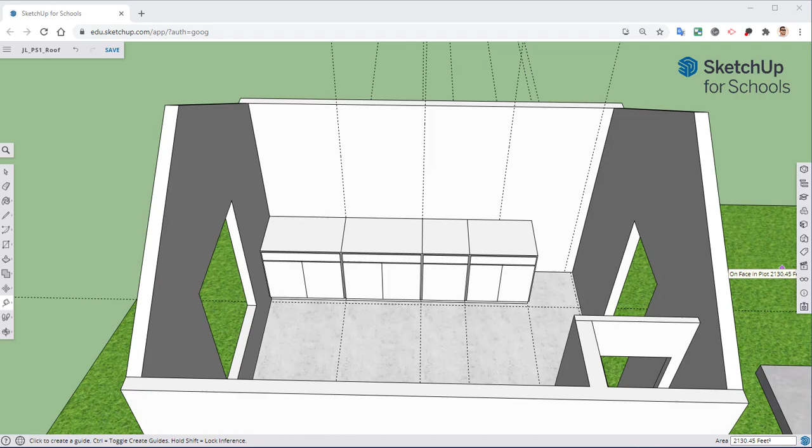In this episode, we're going to finish up the right side of our cabinets and then start working on the left side. For the base cabinets, we have this one spot left, and we already have it spaced out. This is going to be a 24-inch 3-drawer cabinet.

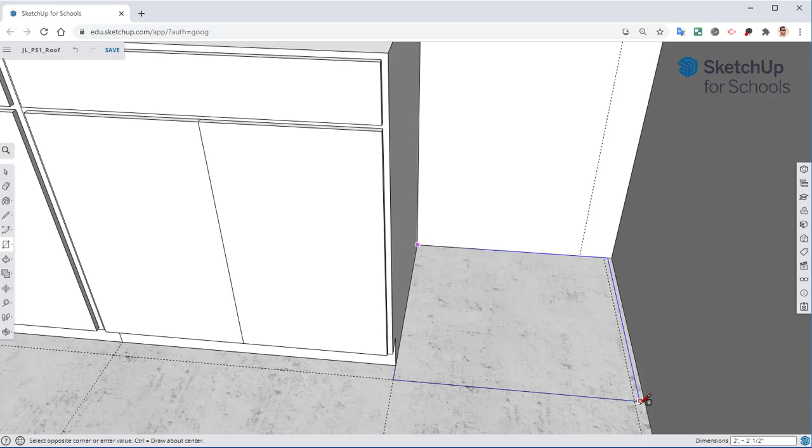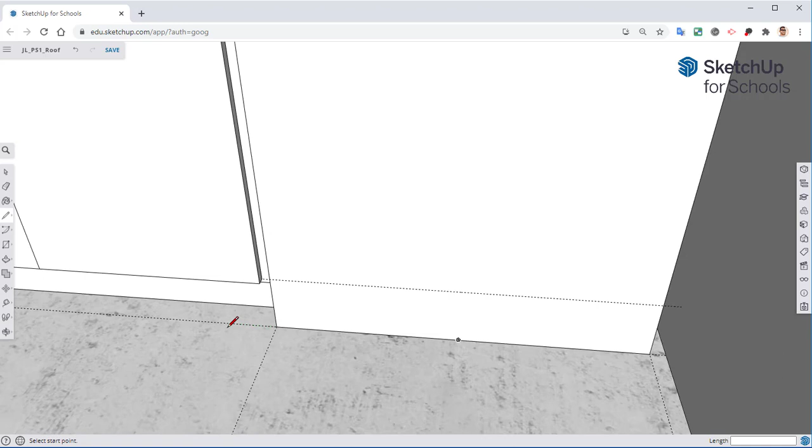Take our rectangle tool, draw in our rectangle, use a push-pull tool, and pull this up to 34.5 inches. At the very bottom, take our tape measure, click the T key, type in 4 inches, hit the L key for the line tool, and draw a line across. Use the push-pull tool and pull this back 2 inches.

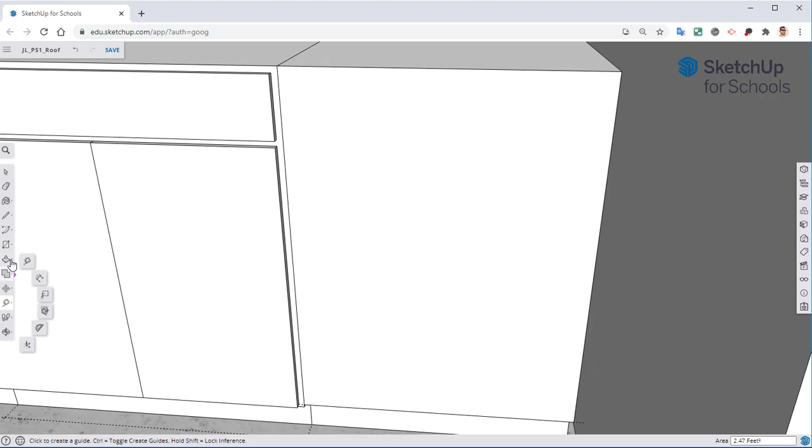Click on the offset tool, do an offset of 1/2 inch. For this one, we need to, like we have previously, draw in these 2 lines and erase this bottom line.

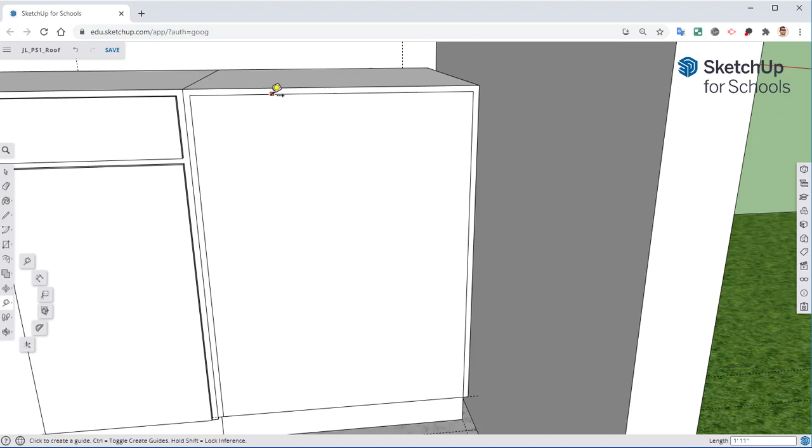For this one, it's going to be a 3-drawer cabinet. So from the top, we're going to go down 5 inches, then .5, the next one is going to be 9.5, then 0.5 again, and then we have the rest of the cabinet.

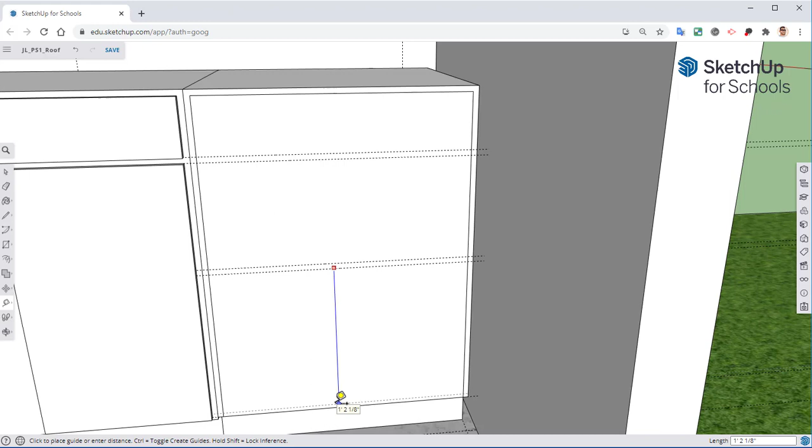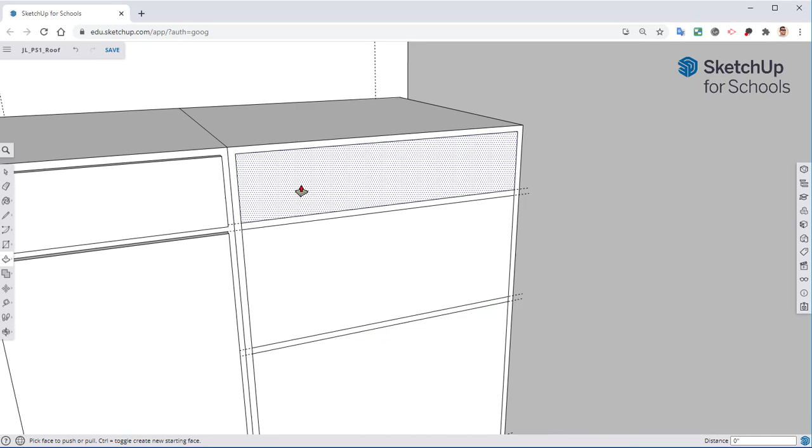From here, we're going to draw in our rectangles, use the push-pull tool, pull these out 1/2 inch. Take your eraser tool, and we're going to clean up our guides and extra lines.

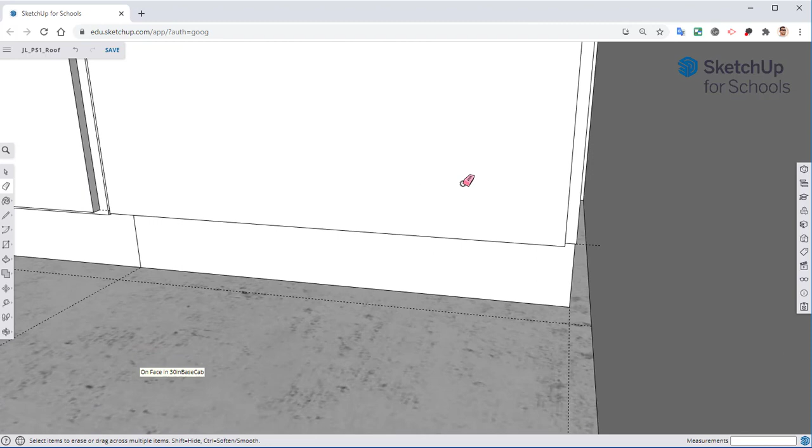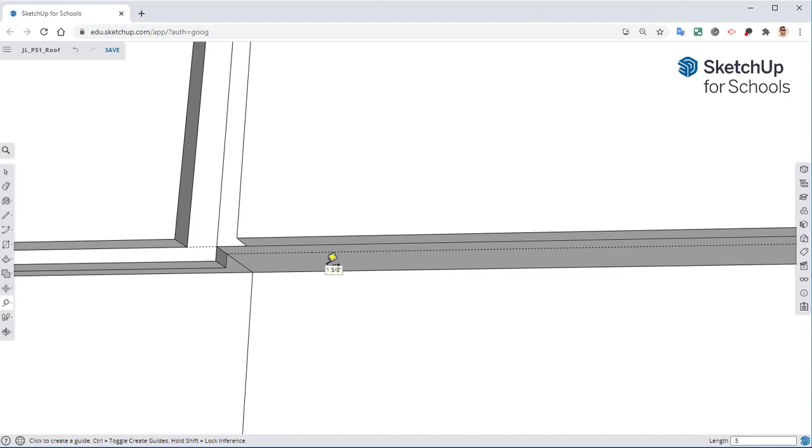Underneath, we're going to again draw our line like we did previously, going across. Use your tape measure, go backwards 0.75, or actually go back 1/2 inch. Take our line tool and draw in our line going across.

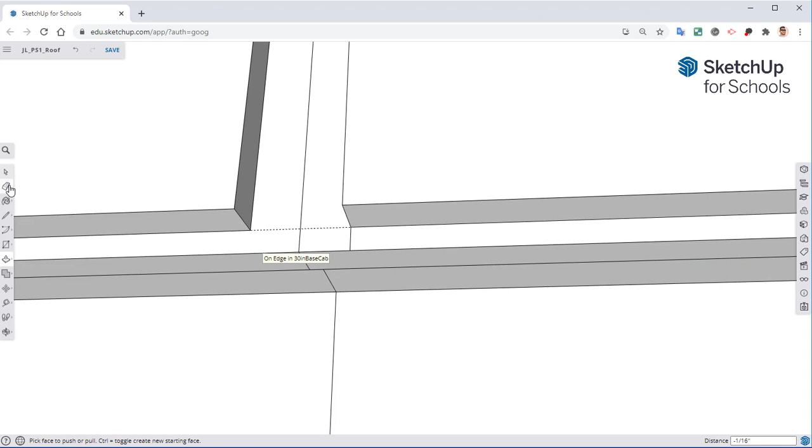Push-pull tool, and we're going to come over here and pull this down to line up with our others. Go ahead and erase our lines that we don't need. Okay, there we go.

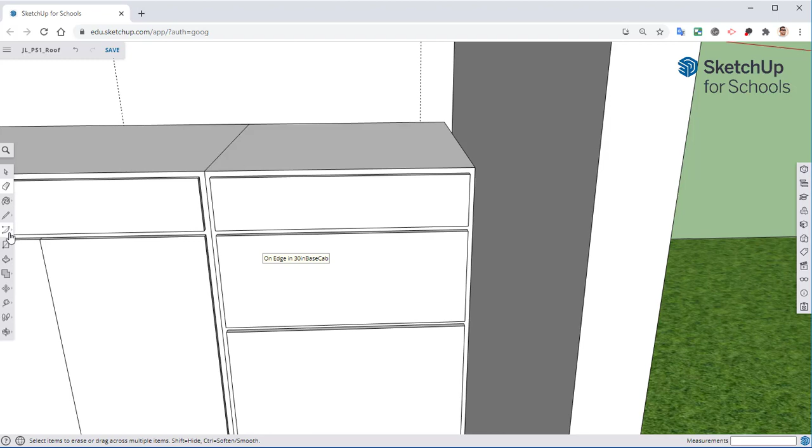On this other side, I want to take my rectangle tool. Actually, we'll just take our line tool, draw in a line from the very bottom going across. You can use your arrow keys to make sure you align them to the red, blue, and green axis. This one is going to go straight up.

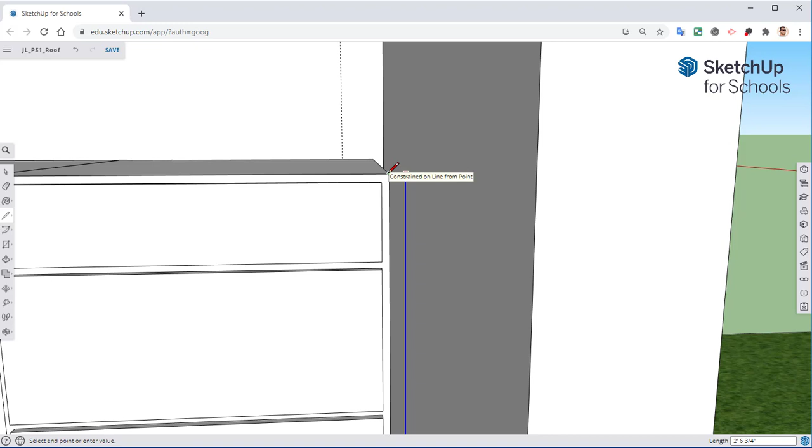Hit the up arrow key, move over to the top of the cabinet in order to constrain it to that point. Go ahead and click there, and then draw in our line to close in our rectangle. Take your push-pull tool, and we're simply just going to pull this back 0.75.

Triple click on that cabinet, right click, and we're going to make that a group.

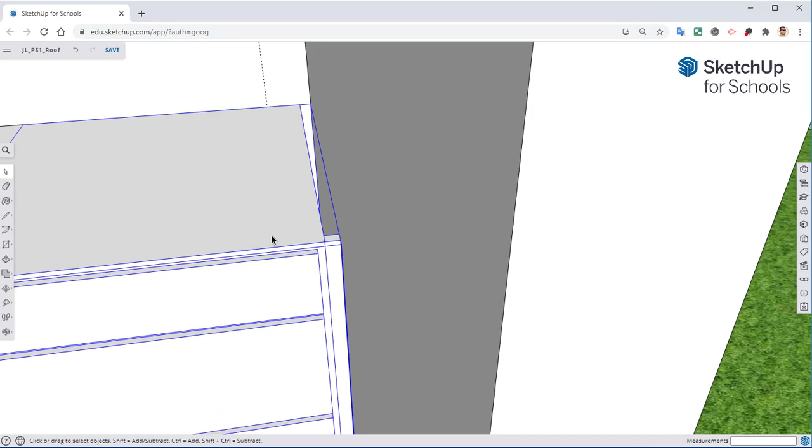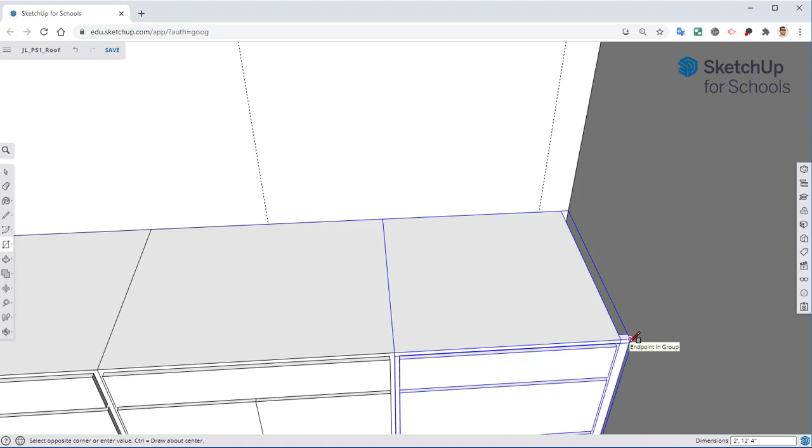Next, we have our upper cabinets. First off, let's go ahead and draw in our countertop. Again, this is going to be one big rectangle. Take your push-pull tool, pull this up 1.5 inches, and then pull it out 1 inch. Take your selection tool, triple click on it, right click, and we'll make that a group.

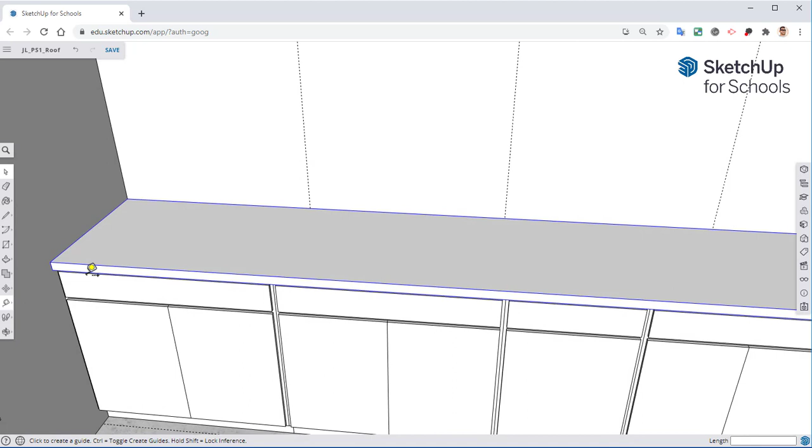The upper cabinets are 18 inches above the countertop, and they are 30 inches. Then we're going to have 4 of them, and we'll have 1 gap over here on the right.

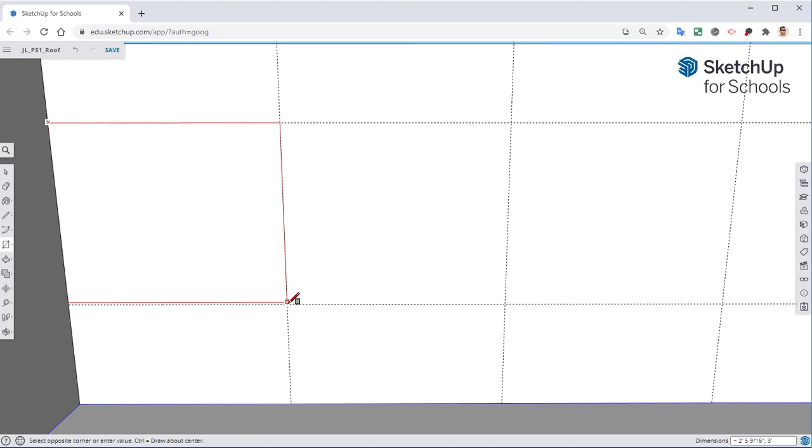So take our rectangle tool, draw in our rectangle. Push-pull tool is going to be 12 inches. Click on your offset tool, offset of 0.5.

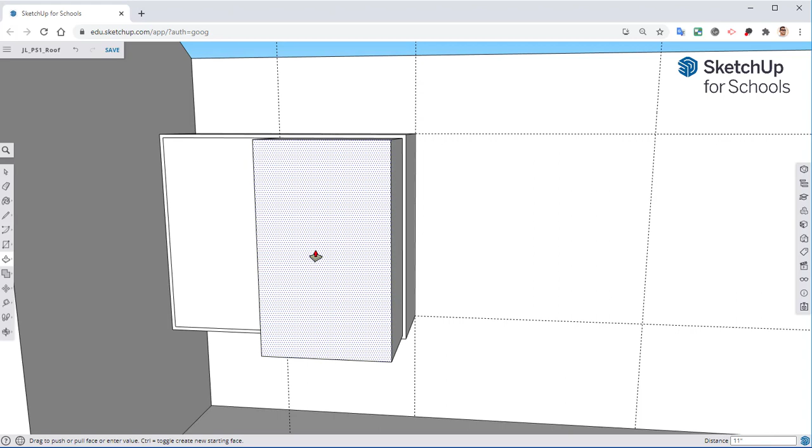Take your tape measure, and we're going to find the midpoint, and we'll draw in our rectangles. Let's pull these doors out 0.5, and we can pull that one out 0.5 as well.

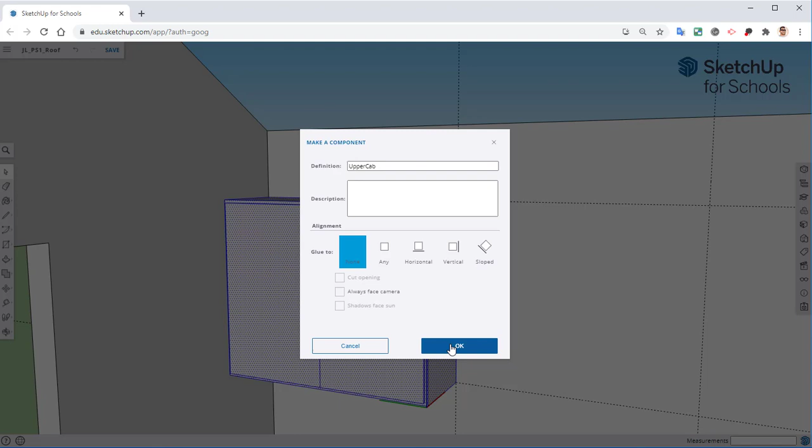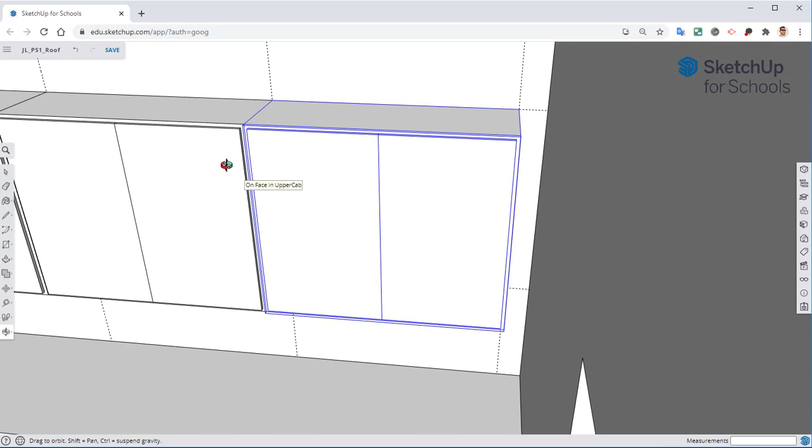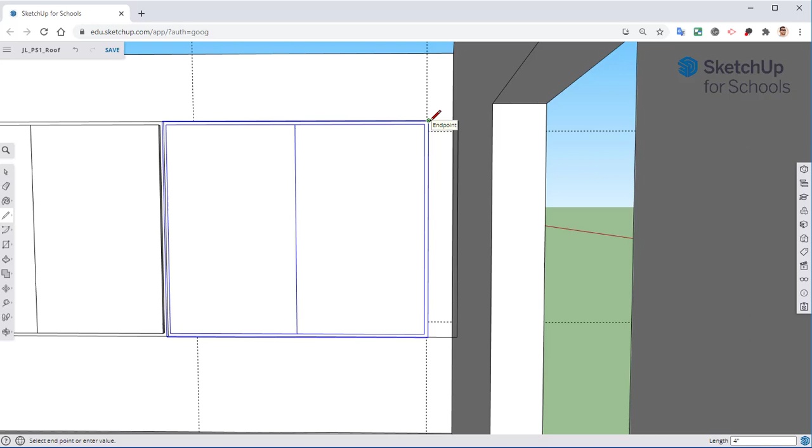We do have this space over here, so same thing we did before, take our line tool, go from there, go there, connect the line. We need to draw in a line going down, and that will close in our rectangle. Go to the back, push-pull tool, and go 0.75.

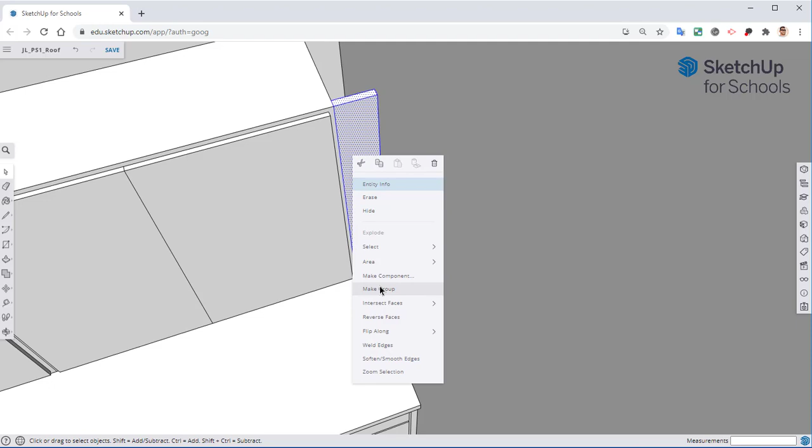Triple click on it, right click, and we'll make that a group. So we turn that into a group.

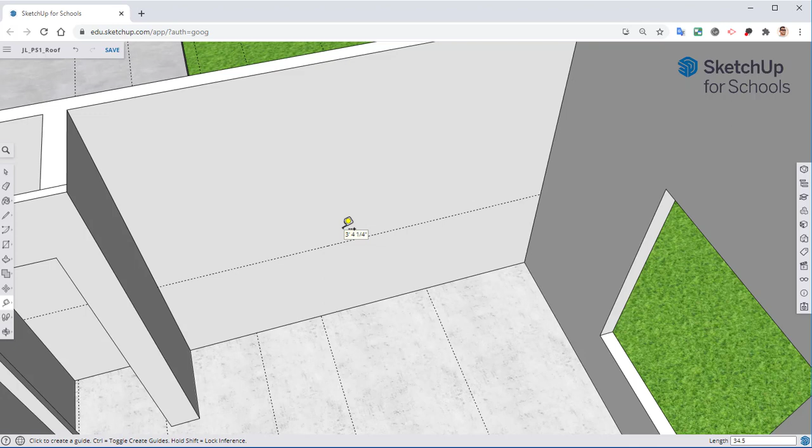We'll do one more thing on this right side. We're going to draw in our measurements. So our base cabinets are 34.5 inches. We have 1.5 as your countertop. We have a gap of 18 inches. And then this is where our countertop or upper cabinet is going to be.

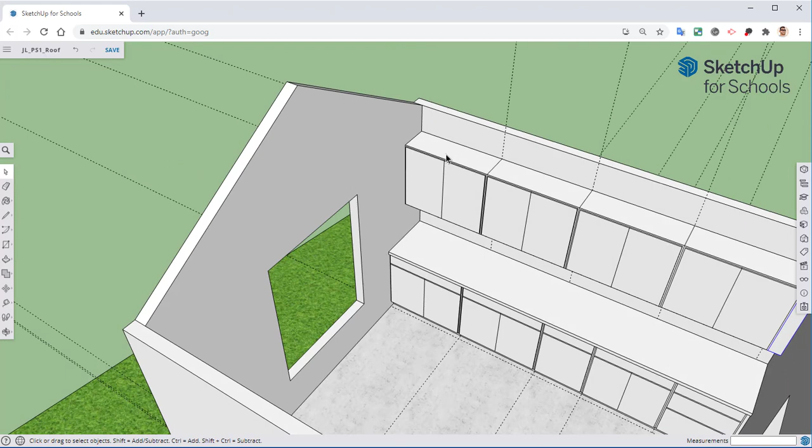With the selection tool, hit the spacebar, click on one of them, it doesn't matter which. Take your move tool, go ahead and hit Control, drag them over. If with the move tool you hover over the red X, you'll get a protractor, rotate it around.

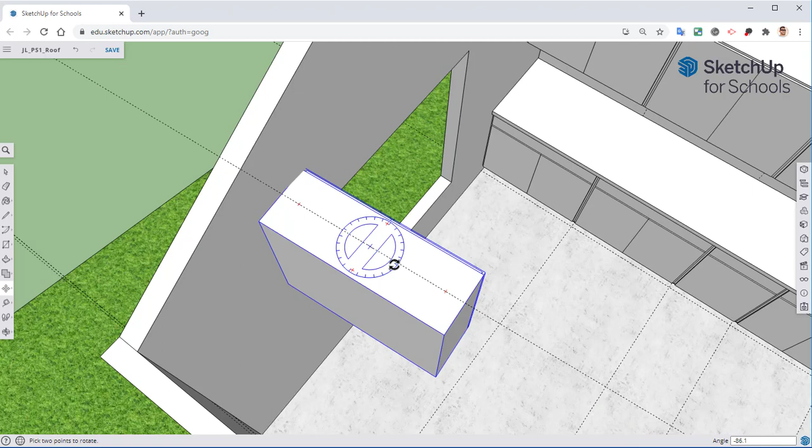Move it against the wall. Go down here to the very bottom, and we're going to move this corner to this corner.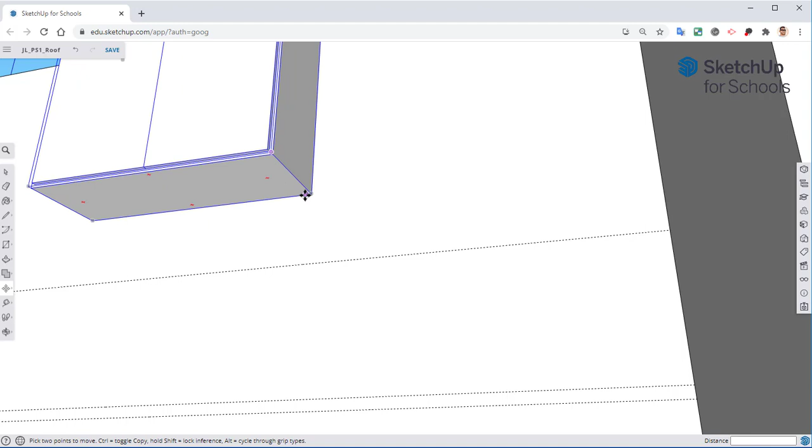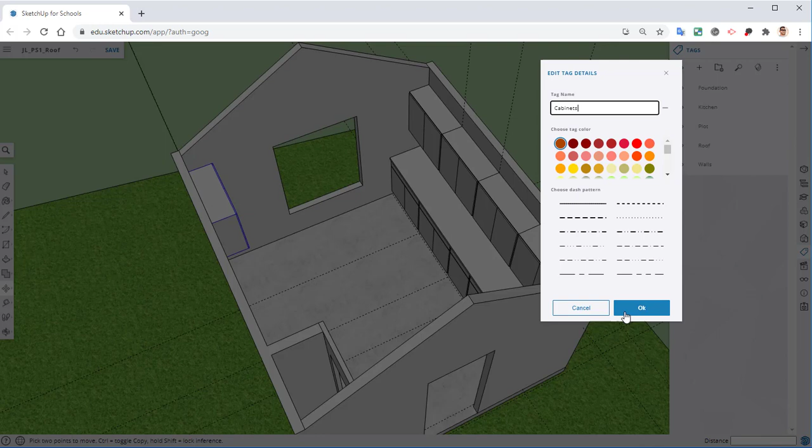We open up our tags. One thing, I want to relabel the kitchen tag. So click on Edit tag. This is going to be cabinets. If you wanted to change the color, we can change our color to maybe a turquoise, click OK.

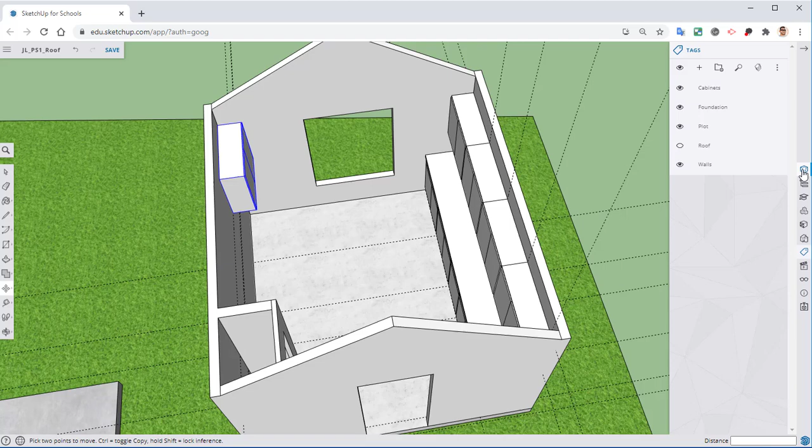We can also come in here to assign tags. Click on our Entity Info. With our Entity Info up, click on each one of these, and we just want to quickly list all of these as the cabinets.

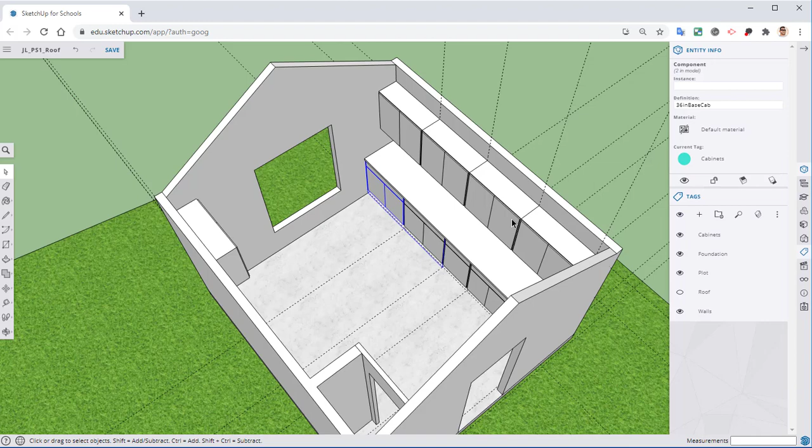Remember, you only want to make sure that anything that is a group or a component gets a tag. Everything else should be listed as untagged.

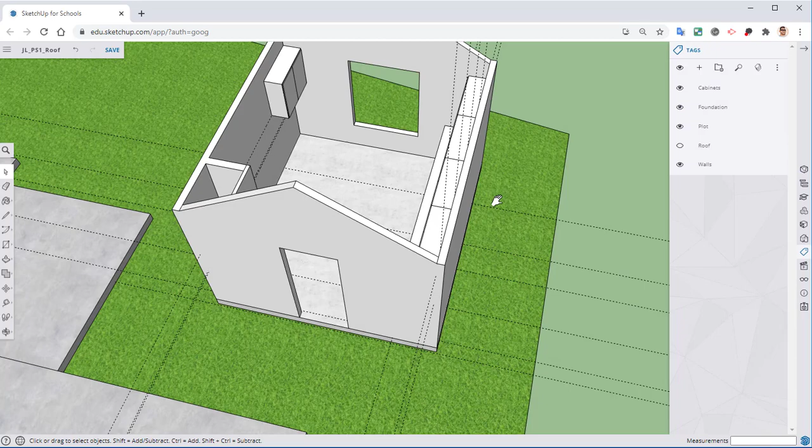So now we have all of that, we can close that out. We can hide the cabinets. Everything else should hide. We can turn that into our cabinets as well.

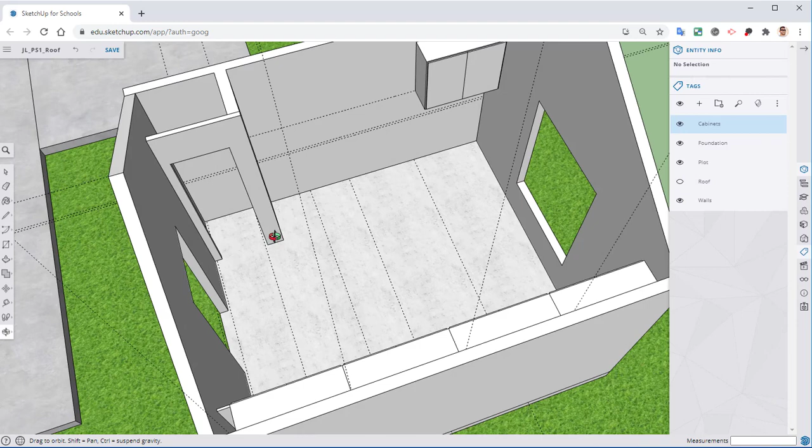And that's where we'll stop here. We do need to finish up the base cabinets over here on the right. We're also going to use the Follow Me tool in order to create our window and our two doors. We'll bring in some things from the 3D Warehouse, such as light switches, power outlets, and door handles and stuff like that. Then we'll go ahead and put some materials on and finish everything up.